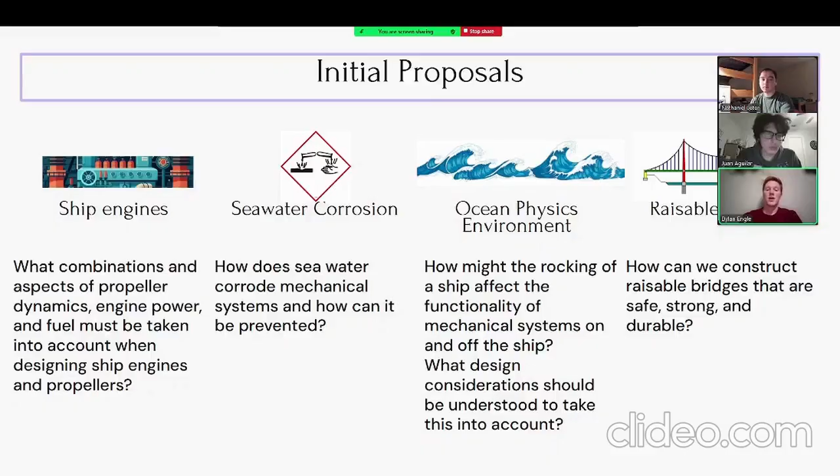Our proposal is we had a whole bunch of initial proposals we looked at, including ship engines to make sure that they are as effective as possible. We had ways to combat corrosion and prevent it. We had one that dealt with ocean physics to make sure the waves and the movement of the water and all the storms would not affect whatever machines we put out on the water. And then we also had raisable bridges, to make sure they are as strong and safe and durable as can possibly be.

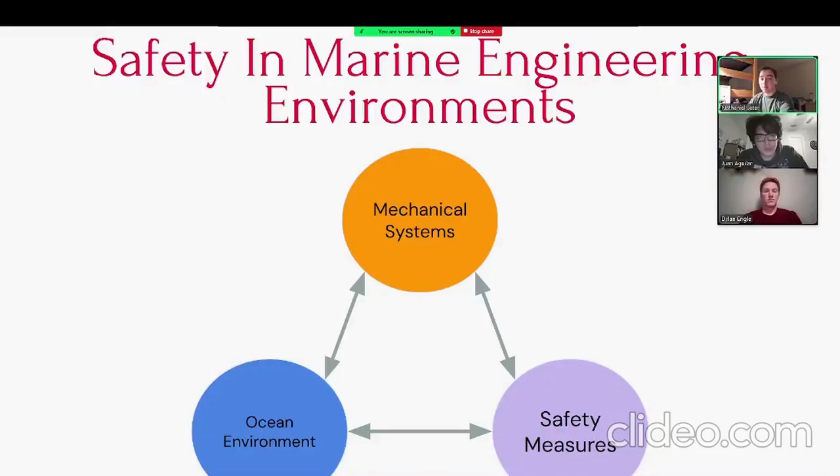Yeah, so the proposal we decided to research was, as previously stated, based on safety in marine engineering environments. We chose to base our research on this because the ocean environment is full of factors that increase the risk of harm to operators and mechanical systems in marine environments, and it's not a commonly researched or thought of area. And so, identifying the research on safety measures to implement in mechanical systems would be very important, especially considering us who will be designing such systems in the future. It encompasses an aspect of mechanical engineering that is not often the first object of consideration, yet is important to the final project.

For our final thesis proposal, there were four aspects of safety and how it is involved with mechanical systems on water. The first aspect is bearings within a ship and how they can become safer and more reliable and lead to more durable systems. Additionally, we considered hydrogen sulfide and how organic matter in maritime environments leads to the production of toxic gas. We also considered biofouling, which contributes to the production of hydrogen sulfide as well as contributing to the failure of systems. And lastly, but importantly, is emergency equipment on a ship and how that can be integrated into ships safely and efficiently.

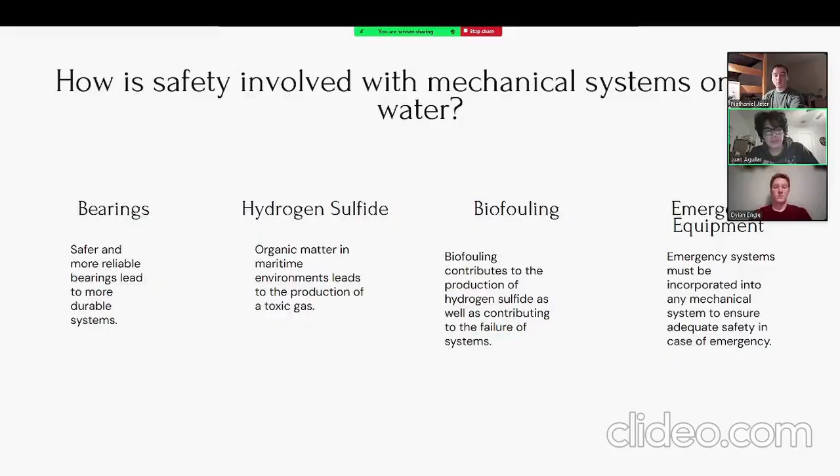So safety equipment is one of the big things mechanical engineers have to deal with, especially when it comes to aquatic nature and aquatic buildings and anything on the ocean that they design, because they are so much further away from the normal forms of help, such as the fire department. By state law, most anything in Texas has to have some sort of safety precaution signs as well as equipment to protect them from fire, damage to any sort of vehicle, and bodily harm.

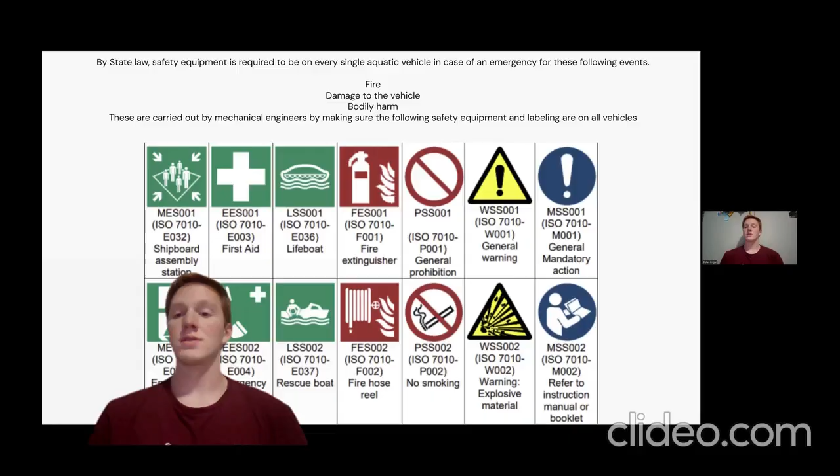Now, we on our boat tour saw the Royal Caribbean Cruise Terminal, which has quite a few of these plans themselves. They are made out of flame-resistant materials that get checked every few years just to make sure they're still structurally stable, especially with all the harsh weather that we have down here. They have fire evacuation plans as well as very high-quality fire detectors to prevent fires and notify any fire departments that need be if there is a fire that breaks out. And they also have clearly marked exits that allow for the easy funneling of people out of the building in case of an emergency.

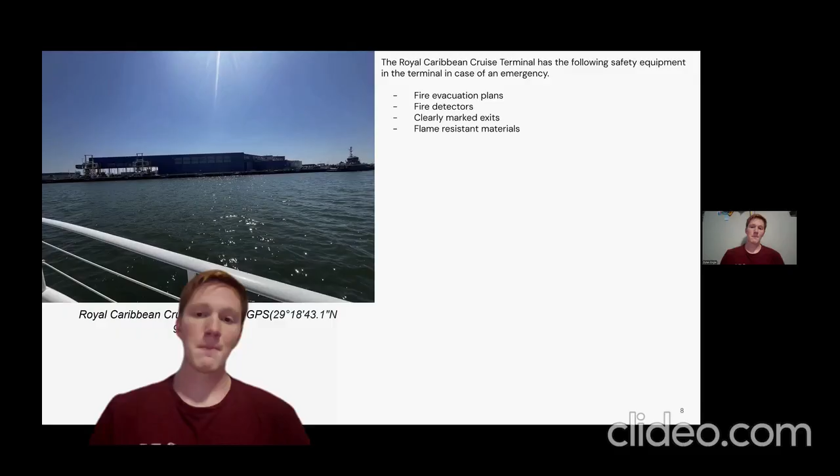Another place we saw was the Gulf Copper Drydock. This one was designed by mechanical engineers to store boats outside of the water, but for the larger boats. And it was designed with these systems in mind to keep it safe. Again, the fire detectors and the different deterrents, since this time you won't be able to get the fire department to them.

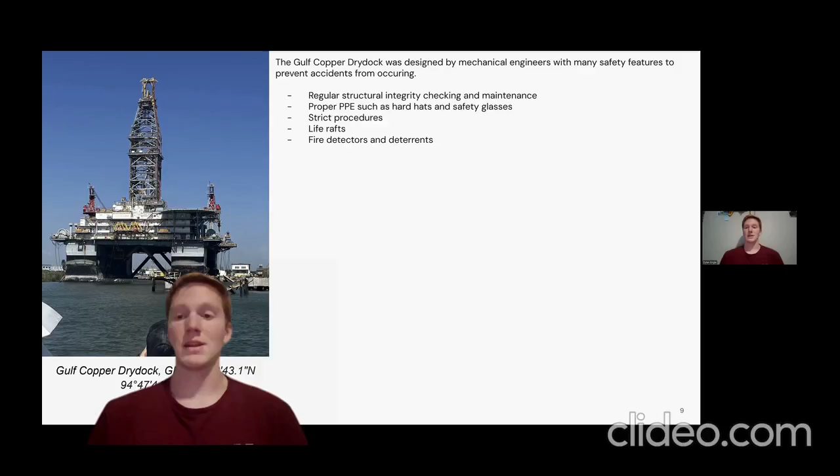There is proper personal protective equipment required, like hard hats and safety glasses, and in most cases, gloves as well, just to avoid any bodily harm. And then there are regular structural integrity checks and maintenance to make sure it stays up to date and stays safe.

Hey there, I'm back. So I'm here to talk about hydrogen sulfide and its dangers on a ship and how that can be identified, where they're sourced, and how they can be prevented. So hydrogen sulfide is a toxic gas produced by bacteria that feed on organic matter in any place that a chemical or organic matter is left to decompose on a ship. So anywhere that this bacteria is and something it can feed upon, the bacteria will release this toxic gas.

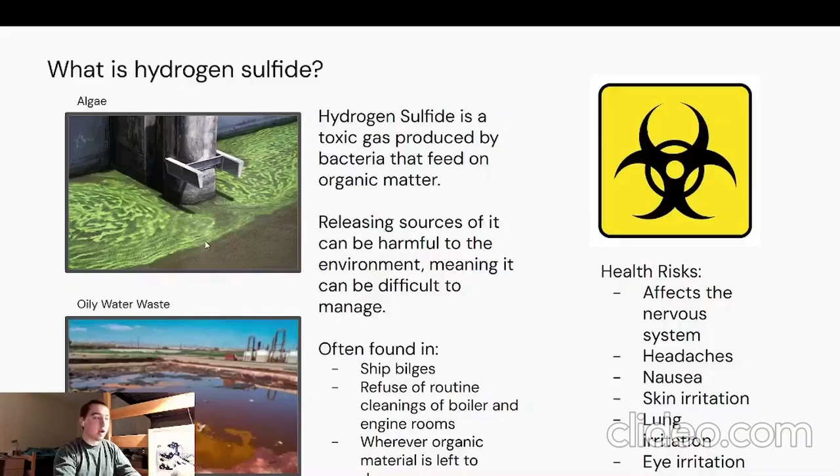This gas is often found in places such as ship bilges, the refuse of routine cleanings, and wherever organic materials are left to decompose. This gas is dangerous because of the health risks it poses to operators and anybody working on a ship. The higher the concentration, the worse it can affect the person, even to death. So, hydrogen sulfide gas comes from the bacteria as demonstrated by this study. This study was conducted by the Department of Defense back in 1995, and a research team was given the task of finding where hydrogen sulfide gas was produced, how it was produced, with the intention of being able to mitigate the issue.

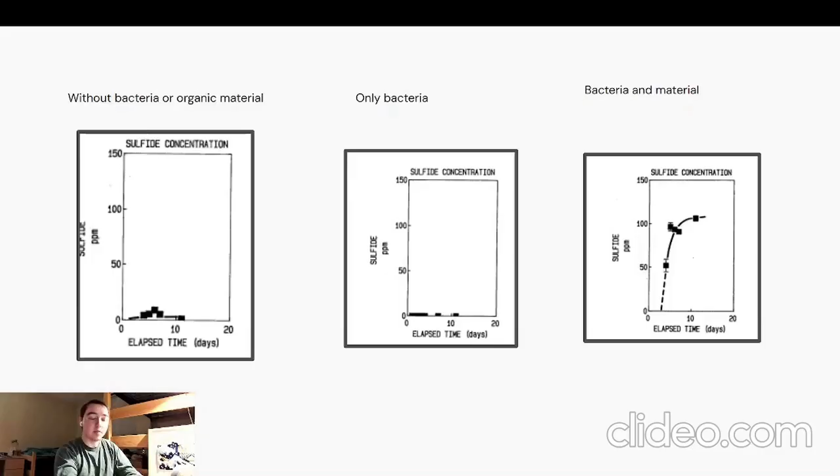So as you can see, the first graph shows the production of the gas without bacteria or the material that it feeds upon. The second one shows only bacteria, and you can see that both of these show very little production of gas. And finally, the third one, when live bacteria and the material that it feeds upon are both present, the production skyrockets, which can lead to even more fatal possibilities for any operator on a ship. So how can we mitigate this?

So we hypothesized, and the study also had its ideas to offer. We posited that properly ventilating enclosed spaces can prevent the buildup of hydrogen sulfide, in addition to reducing the use of oils and lubricants. Proper cleaning, from using the correct detergents and cleansers that will not be fed upon to produce this gas, as well as techniques that prevent excess use of these chemicals, in addition to the proper disposal of anything that's produced from cleaning or just from leaking. All of these to prevent the accumulation and or production of this toxic gas.

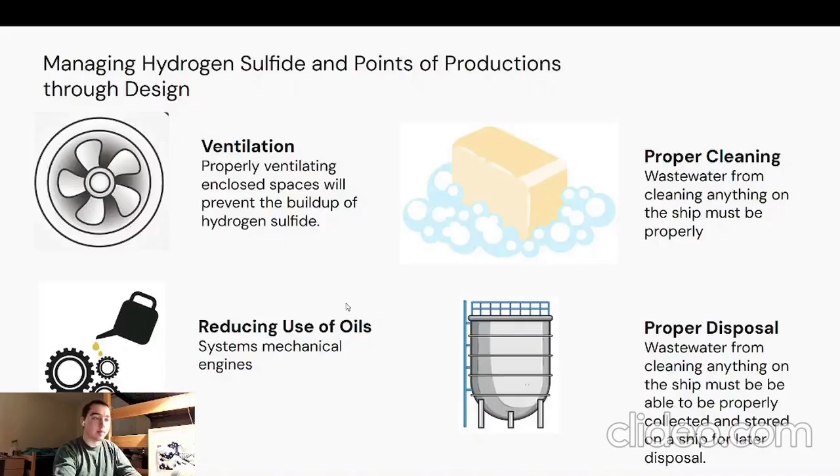Now, an additional topic that can contribute to the production of this gas, but is also a problem on its own, is biofouling. Biofouling is the accumulation of any organic material on a physical surface on a ship. And so there's two types. Microfouling is a slimy biofilm, and it's a precursor to macrofouling, which is the accumulation of large communities of immobile marine organisms. So both of these on a ship contribute to decreased efficiency and rapid breakdown of systems, so the durability goes down. In addition to being a source for the hydrogen sulfide once this stuff decomposes.

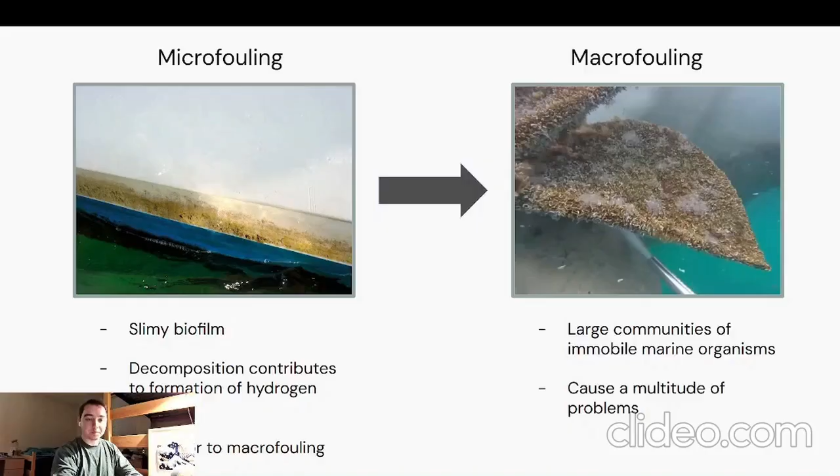So, how to prevent biofouling in design? There are many ways, including one, elevation, which decreases proximity to water. These pictures are sourced from our boat trip that we took around the Galveston Harbor. And one of the tactics we were able to observe was this oil rig. As you can see, it is elevated above the water, which, among the many reasons it is elevated, decreases its proximity to the water, which is carrying all these organisms that will attach themselves and contribute to the accumulation of this biofouling.

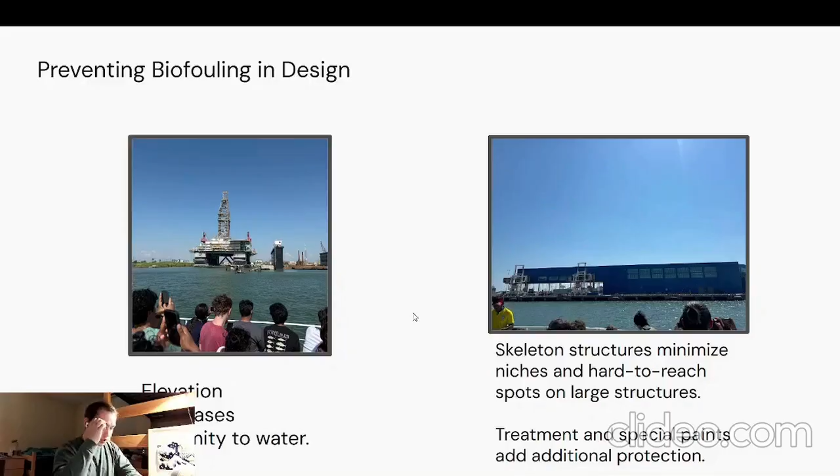In addition, skeleton structures, as you can see in the cranes in the second image, minimize niches and hard to reach spots on large structures by minimizing the surface area. In addition, these structures are also painted and treated in a way that will prevent them from accumulating too much biomatter.

Second, some more pictures from our trip. Sheer surfaces, as you can see in the first photo, allow for easy cleaning. So anything that does accumulate, because something will accumulate, can be easily scraped off or cleaned off. No niches. Finally, metals, plastics, and concrete are materials that are strong and can receive biofouling without being damaged significantly.

So this ship that you can see here in the photo has been there for about 100 years, since the 20s, yet it is still in remarkably good condition. Now, it is degraded and dilapidated, but it is still holding itself together, and the parts that were made of concrete, the material in question, have not received as significant damage as one would expect over hundreds of years, even with organisms growing on it, as can be observed somewhat in the photo.

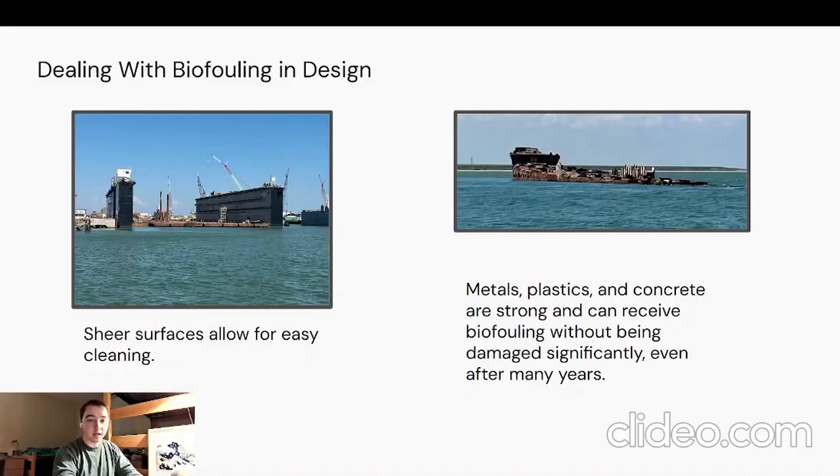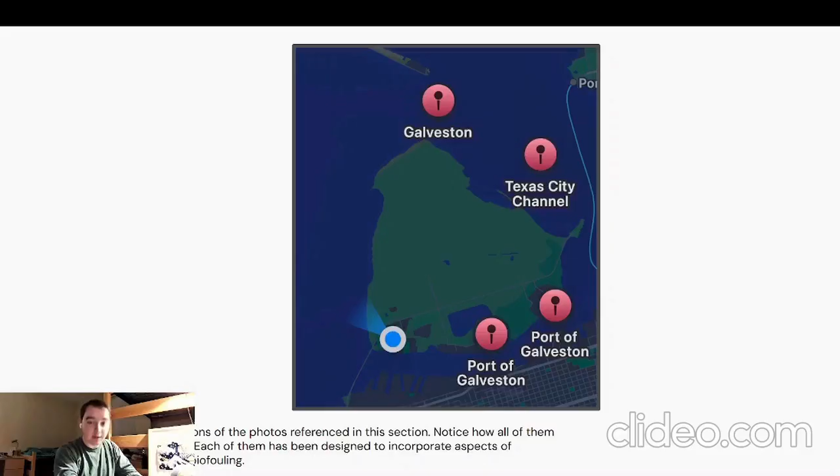Now, finally, you can see that all of these photos are sourced from an industrial port area, which just goes to show the importance, as mechanical engineers, of considering these things while we design our systems, because they will be used in frequently frequented, you could say, areas for ships and the shipping industry in general. So it's important for our systems to be able to accommodate ships for many years, as the ones here are doing, effectively and efficiently without too much decrease from biofouling.

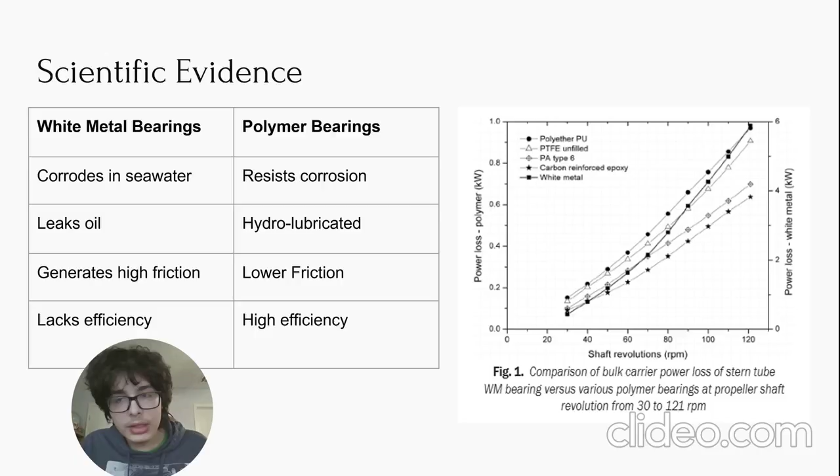So as you can see here on the left, you have the table that compares white metal, which is traditional, to polymer bearings. You can see how they differ in efficiency and how it will affect the ship, while on the right, you have a table where revolutions within a ship increase, which is your x-axis. On the y-axis, you have the power loss. So as you can see in the table, the white metal, which is shown in the legend, has the greatest power loss amongst all of the polymer and carbon-reinforced epoxies used. So this shows that even something as simple as bearings within a ship still has a great impact on the efficiency of that ship in a marine environment.

So thank you for watching. This has been our presentation on our proposal for extended research on these various aspects of how safety measures can be implemented into mechanical engineering designs in the form of additional safety measures, as well as preventing the formation of hydrogen sulfide and biofouling, as well as using better bearings in our designs. So thank you for watching, and I hope this has been enjoyable to see.